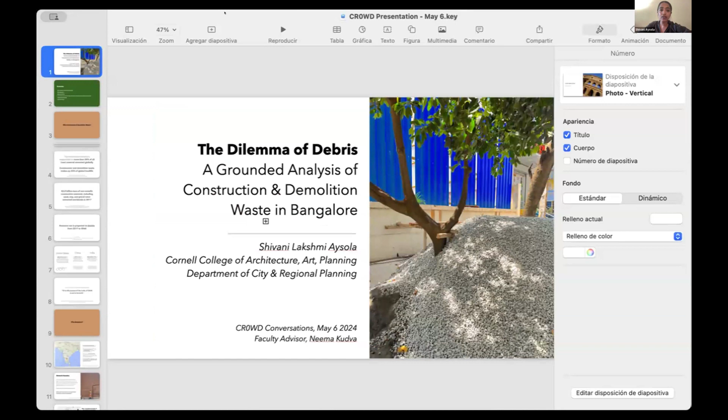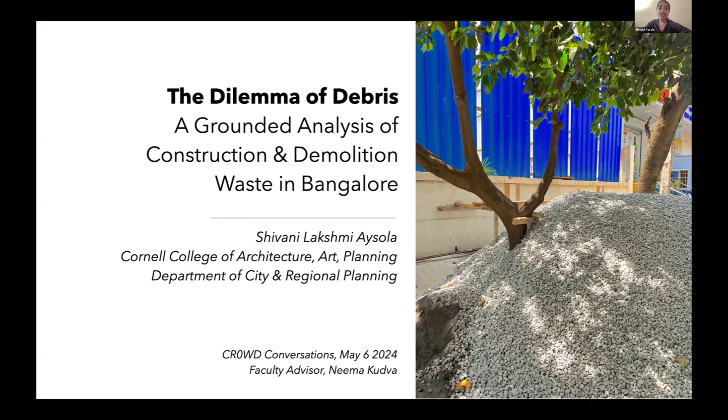Hi, hello everyone. As Gretchen mentioned, I'm Shivani Lakshmi Aysola, and I'm really excited to share my research with you today. The working title is The Dilemma of Debris. It's a grounded analysis of construction and demolition waste in Bangalore. My faculty advisor for this project is Neema Kudva here in CRP.

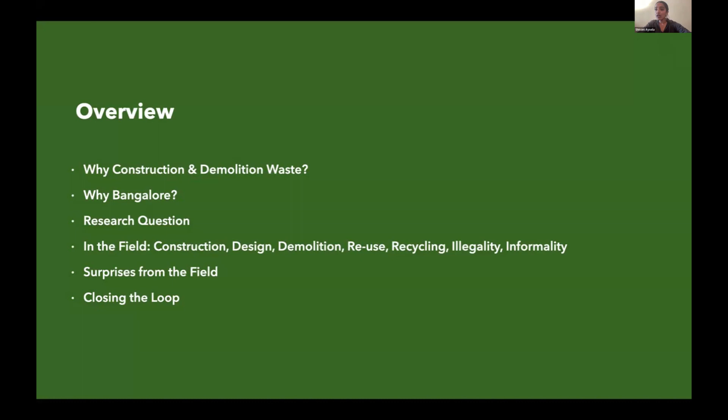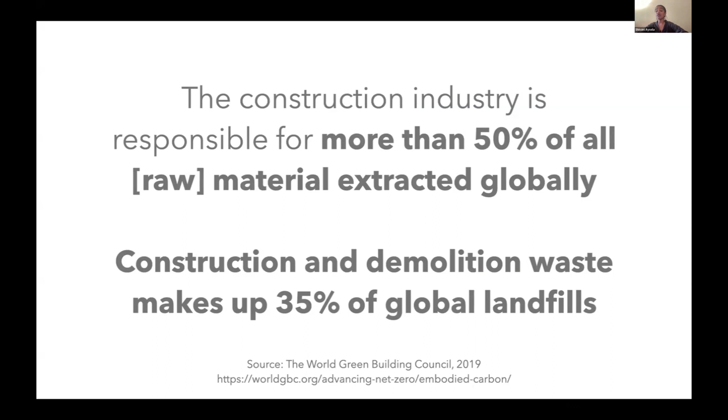So why construction and demolition waste? This is the question of the hour. As maybe most of us know, but if you're new to this type of research, I think you'd be interested to find out that the construction industry is responsible for more than 50% of all the raw material that is extracted globally. And of that, construction and demolition waste make up about 35% of what you see in global landfills. So this is a huge issue.

Of that, about 44 billion tons of non-metallic construction materials, and this is your sand, clay, gravel, all of that, were extracted worldwide in 2017, and it's only been exacerbated. And here's the fun part: resource use is projected to double, actually, from 2017 to 2060. So going back for a second, if we were at 44 billion tons of natural resources in 2017, you can imagine how much that'll be in the next 30 years or so.

Okay, here's just some quick facts. In the United States, 600 million tons of CDW, that's construction and demolition waste, were generated in 2018. That's twice the amount of all the other municipal solid waste. So everything that your households and offices are sending to landfills, this is actually doubled, just CDW alone. China has 1 billion tons of CDW, and they're only able to recycle 5% of that. India also has 300 million tons, and only 1% of that is recycled. So that's sort of the issue that we're dealing with.

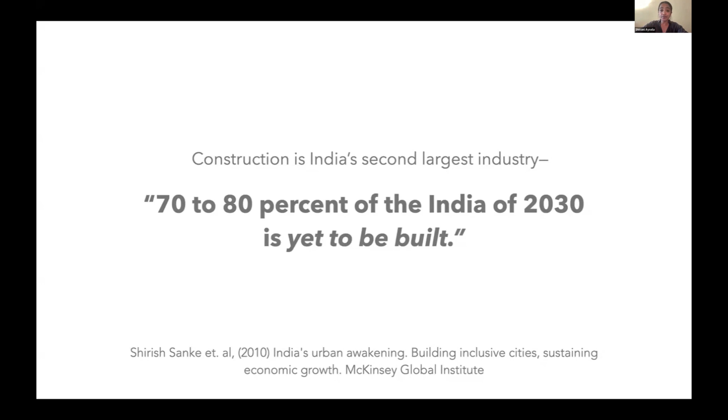Focusing in on India for a second, construction is India's second largest industry. And given the growth of the country, about 70 to 80% of the India of 2030 is yet to be built. So why Bangalore? Well, Bangalore, which is officially Bengaluru in Kannada, which is a language that they speak in the Indian state of Karnataka, it's India's 3rd largest city, and it's home to 8 million people. It's 11 million people if you include the entire metropolitan boundaries. And it's interesting to note, it's sort of self-stylized as India's Silicon Valley.

It's also one of the fastest growing metropolises, not just in Asia, but in the world, with a GDP for the city alone of $110 billion a couple years ago in 2022. Here's the fun part: all this growth leads to waste invariably, and about 3,000 tons of construction and demolition waste are generated every single day in Bangalore—that's about 250 truckloads of material.

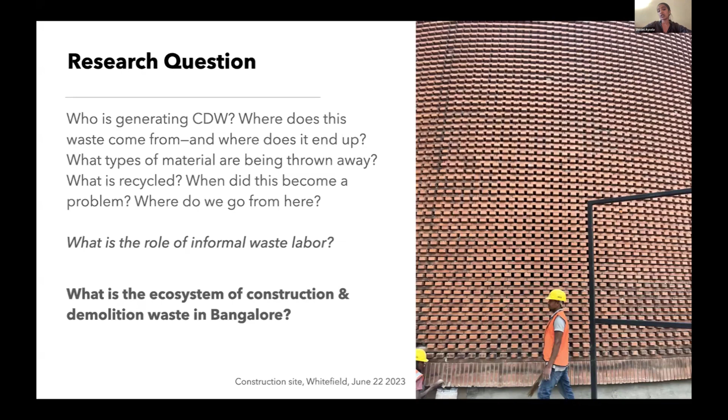My research questions around this project were multifold. I was curious who's generating this waste, where it comes from, where it ends up, what types of materials are being thrown away, what's recycled, what's not, when this became a problem, and where we go from here. I was also particularly interested in the role of informal waste labor, which we'll get to later. But really the all-encompassing question was: what is the ecosystem of construction and demolition waste in Bangalore?

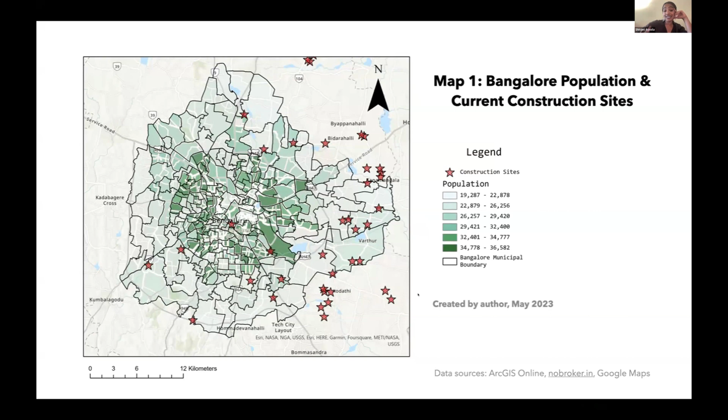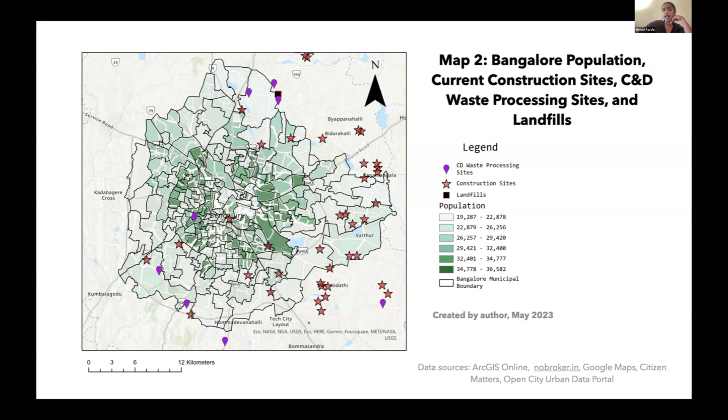Using that framework, I developed an idea around this ecosystem of construction and demolition waste. It starts with construction, goes into demolition, then you have reuse, and then design. Really at the center of this is policy. So that's the framework I was working with.

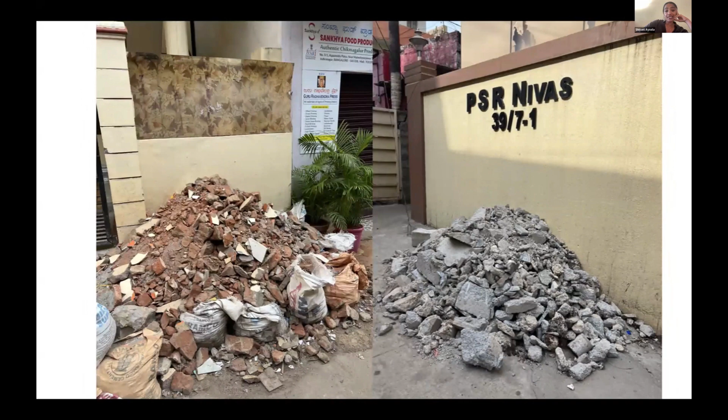Then I got into the field. I was in India, in Bangalore, for about two months last summer in 2023, and I could see immediately the construction and demolition waste everywhere. All these images I took within the first week of arriving, and it's kind of overwhelming—and it's not just the scale, sometimes you have small pieces as well.

This picture on the right is particularly interesting because it was taken at the BBMP, the main governmental headquarters of Bangalore. I was actually there at the offices to meet with their solid waste management officials, and—the calls coming from inside the house—they have their own construction demolition waste problems as well. So I knew I had a lot of work to do.

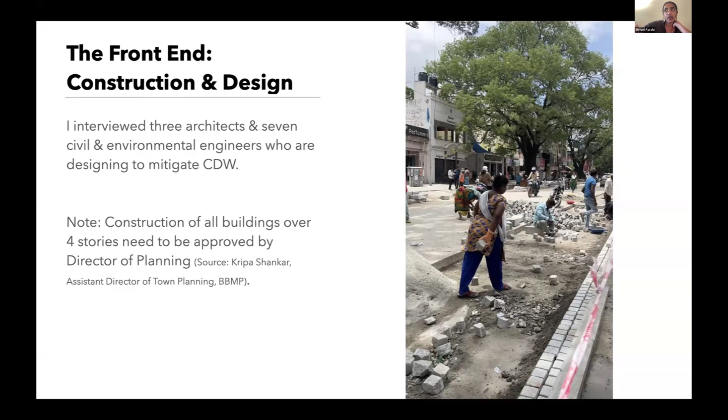Jumping into construction and design, I interviewed 3 architects and 7 civil and environmental engineers who are actively designing to mitigate CDW. Something interesting to note, a bit different from how things work in other cities: in Bangalore, the construction of all buildings over 4 stories needs to be approved by the director of planning. So you can start to see where the control lies.

Another architectural solution is called the Atelier, from another Bangalore-based firm called Biome. Their client was a nonprofit school, and the issue was quite interesting because they didn't own the land they wanted to build the school on—they could only lease it for 5 years. So they came to Biome and said, we need something really modular that could be taken apart and moved elsewhere in case our lease is up.

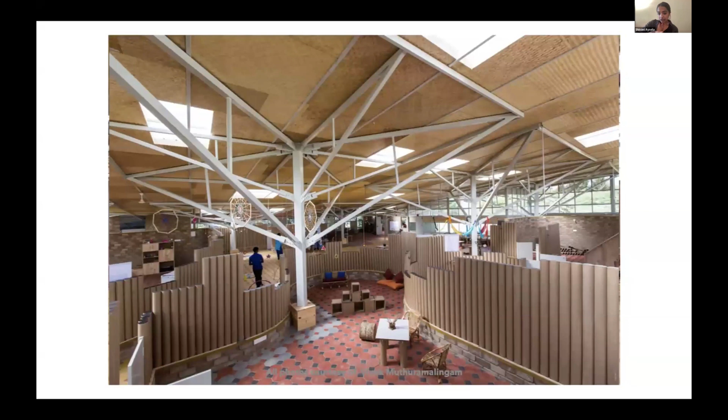Here's another view. You can see all of these cardboard partitions, also modular, can be reused. Next slide, please. Okay, this takes us into demolition and reuse.

These are some quotes from Akbar, one of the demolishers I was lucky enough to interview. He goes into the fiscal realities of his work. Some key takeaways you might find interesting: the average distance between a demolition site and the recycling center is 15 kilometers.

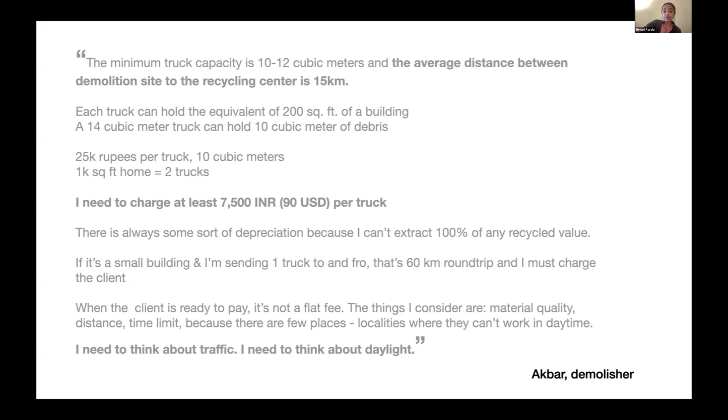They need to charge at least $90 per truck to recoup gasoline, labor, and so on. There's always some depreciation since he cannot extract 100% of any recycled value. This is an important takeaway too, the quote at the end: I need to think about traffic, I need to think about daylight. These are the issues demolishers face, the realities of their industry.

This is Iqbal Ji and I last August at the largest demolition site in Bangalore. He and Akbar Ji, whose quote was in the previous slide, both work above board as licensed businessmen. So I got a lot of intel from them about how the formalized demolition economy works.

It's been really interesting to see how the labor market has changed in their field. In the past, demolishers could sell old bricks for 50 paisa each, about 100 rupees, which comes out to $1.20 of profit. But 20 years ago, wages for daily laborers were between 6 to 24 cents, and now they're $8 to $12 — a huge exponential increase.

What this means is that rising labor costs lead to a more mechanized demolition process. You can see this in the back, there are quite a few large vehicles being used in this process, versus 20 years ago when it was a lot more hand-done demolition.

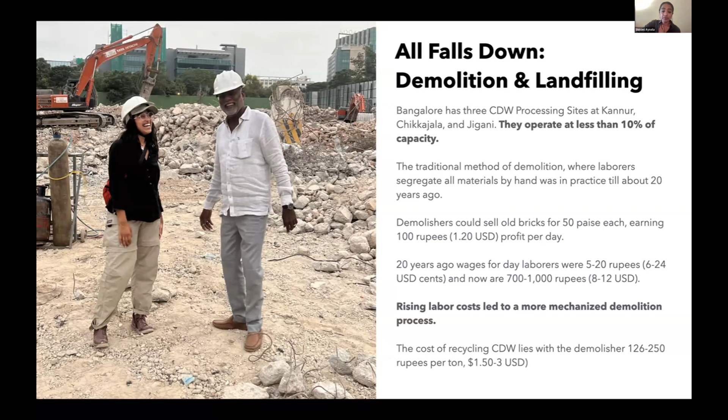So the main challenges for demolishers are rising labor costs, but also the cost of recycling after demolition. For example, Akbar Ji takes all of this waste each day to the recycler, about 15 kilometers away from this site, and then has to pay for it to be processed there. So he's not only paying for gas and workers, but also for the recycling itself, and this doesn't include wear and tear on their vehicles.

At the same time, they're not able to drive their trucks through the city between 10 a.m. to 6 p.m. A lot of constraints here.

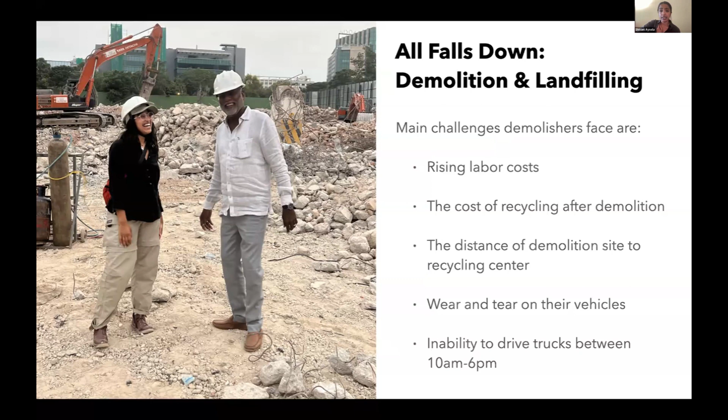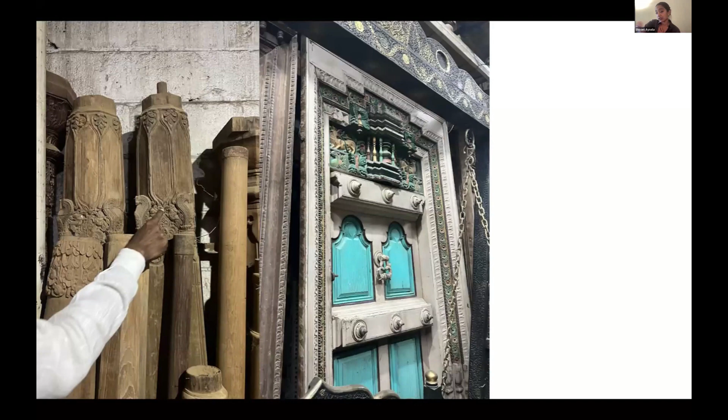This leads us into industrial scale recycling. Key here is the Yelahanka Landfill and Rock Crystal Processing Center. On paper, this is the largest landfill in Bangalore, and Rock Crystal is the only licensed construction and demolition waste processing center in the city.

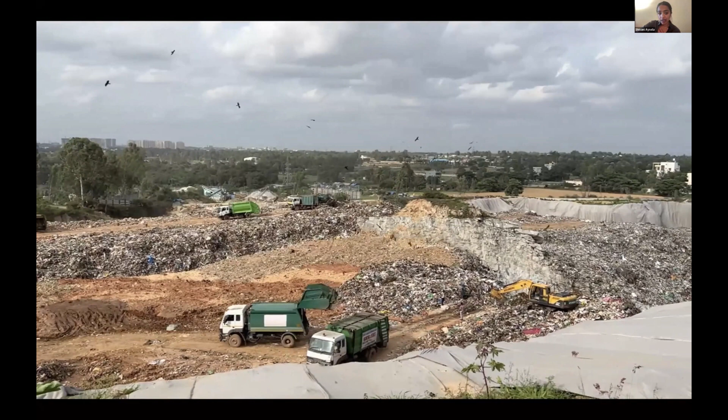So this is the landfill. This actually doesn't smell terrible, I think it's important to note. They do put down plastic at the end of every day, and they spray perfumes and fragrances too, to mitigate the scent.

But you can see it's an old quarry here, so this goes down for miles and miles. And this was last summer, so it's probably halfway filled up more than this now. This specific site should be decommissioned later this year, and it'll be filled up with waste.

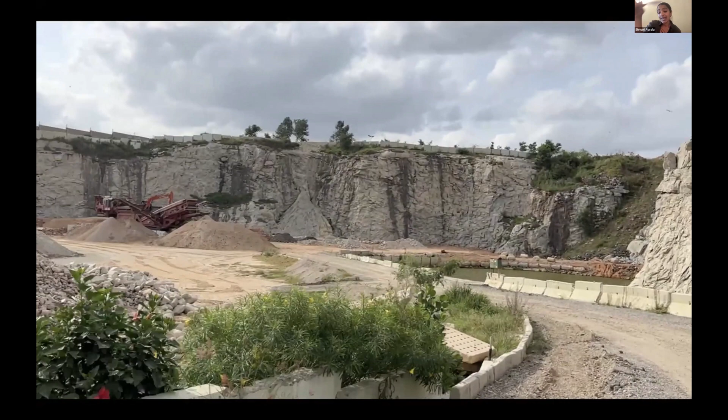So now that takes us into Rock Crystals, which is just over the wall that we just saw. This is the only place for construction and demolition waste recycling in the city, and you can see different types of quarry dust and things of that nature.

I'm going to skip through to the next slide. Oh, just kidding, no I'm not. Let's see, oh yeah, there we go. So here you can see bricks that aren't being pulverized and other types of concrete pylons in the back. So these will get reused just as is.

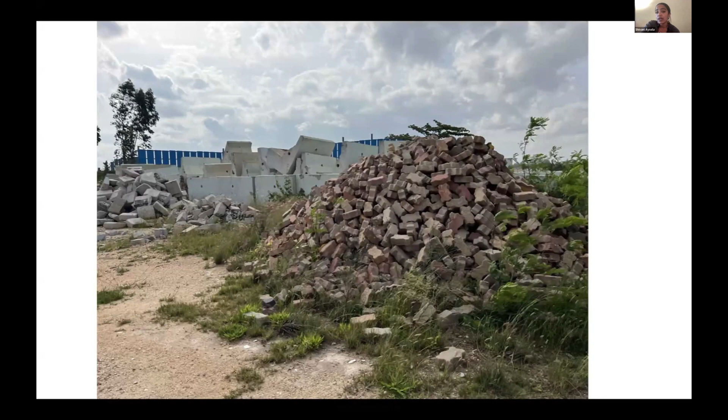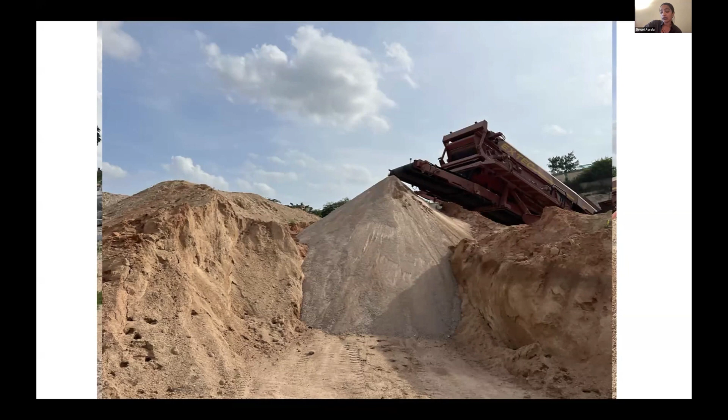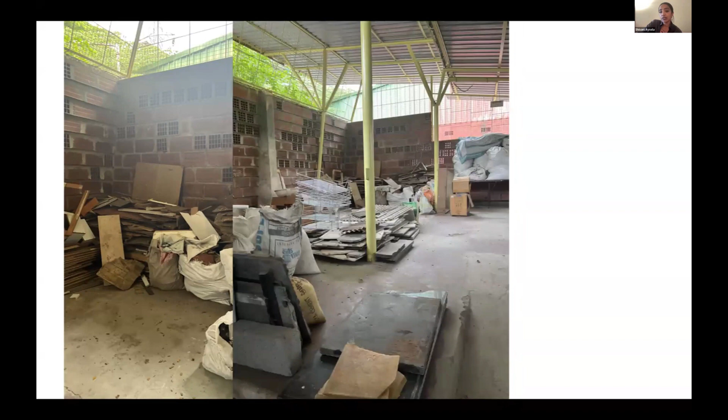Okay, small scale recycling—so we saw industrial, this is small scale. There's an organization called Sahas that is an aggregator of waste, because the industrial scale recycling we just saw has minimums of what they'll take on. So Sahas really works with household waste—if you're renovating a room in your house, for example, they'll collect the waste.

And as you can see, they're segregating the materials themselves, but they don't have a lot of space that they work with—this is just their office. As you can see, they receive 30 to 35 calls a month, but they can only accept 30% of those calls. That's because the waste is mixed, it's not segregated by material, and the location is too far. So we're starting to see the same issues again—it's all about location and the non-segregation of material.

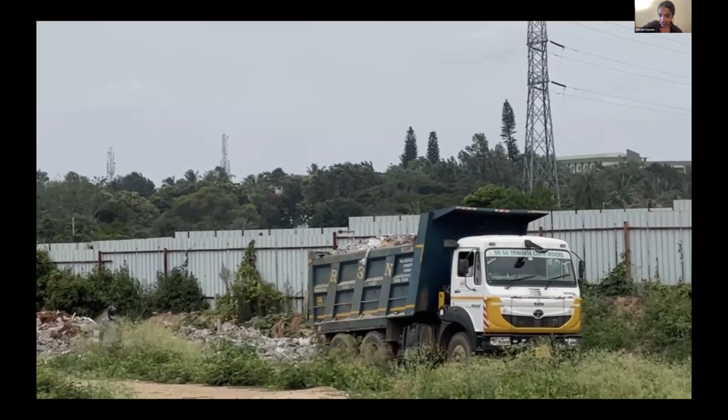Illegal dumping, our favorite topic. I feel very lucky, weirdly, to have caught this on video—here I was actually going to visit a number of lakes that I was told people were dumping construction and demolition waste in. You can see I've just pulled up to the lake here, and this man is just dumping his entire truckload of construction and demolition waste. So I asked him what's going on here, where did he get this material from? They were building an apartment building just down the road, and his boss told him to come here and dump it.

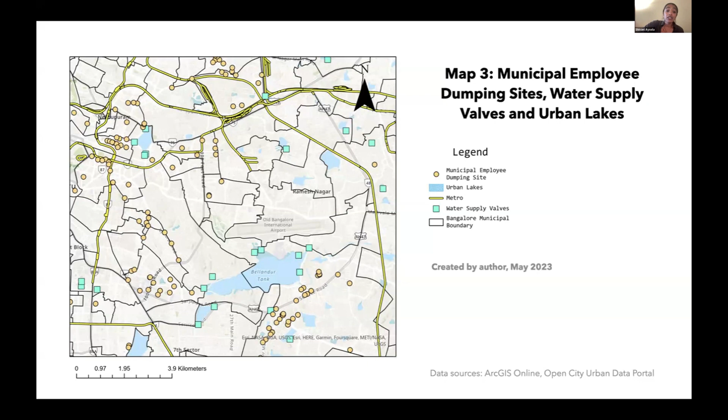This was a really interesting finding for me as well, the connection between the urban lakes in Bangalore and the construction of the metro. Again, the call is coming from inside the house. Here in orange, those circles represent sites where community members have reported dumping by municipal employees. You can see a correlation between where the metro is being constructed and where government employees are dumping, and there is some overlap with the location of water supply valves and urban lakes.

Some surprises, and I'll roll through these, were retrofitting and upcycling. When I started this research, I was really focused on a construction and demolition binary, and I totally didn't realize retrofitting and upcycling were such factors.

I got to go to this great upcycling conference about transforming workplaces. I was the only non-industry person there, and I heard from architects, developers, clients, and people innovating in the materials space. This was really important for me because it doubled down on the fact that it's so much easier to segregate waste when it's for retrofit projects.

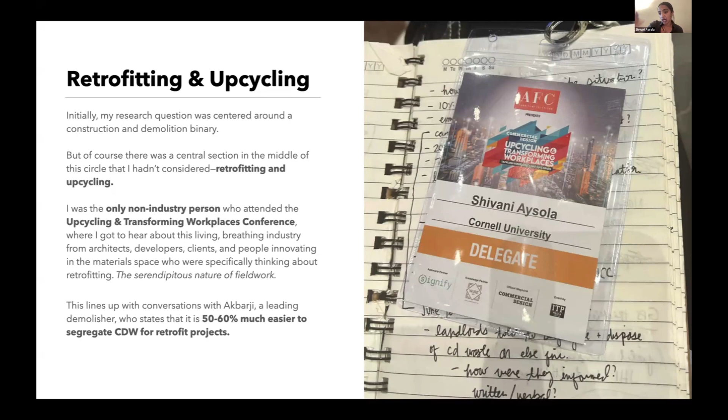Again, there's the role of informality, and if you study India, informality is really the main driver behind the economy. Some estimate that 90% of the Indian economy is informal. So what that means is you have large informal waste economies: plastics, metals, glass, all types of items are sold through a very hierarchical system of recycling and reuse. That's not the case for construction and demolition waste.

We talked a little bit about the metal recyclers and the heritage materials, but concrete and cement make up 30 to 40% of all construction and demolition waste, and it's not being recycled formally. Those plants are only operating at 10% capacity, but it's not being recycled informally either.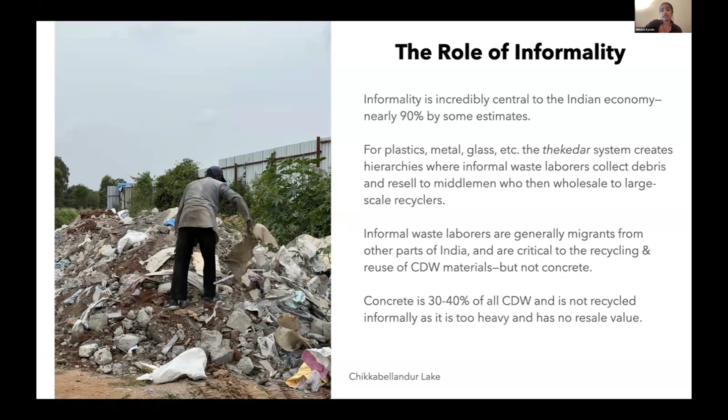This is a man, an immigrant from northern India who came to Bangalore and is working as an informal waste laborer. I asked him, and all the informal waste laborers I talked to, no one deals with concrete. Even the organizations working in waste labor don't deal with concrete because it's too heavy and has no resale value. That was really interesting, where you have a culture of such strong informal waste economies and no one is dealing with this material.

Oh, these photos are not working. Oh no. Oh gosh. Well, I have a bunch of photos here, but they don't seem to be populating really. Oh gosh, well, that's unfortunate.

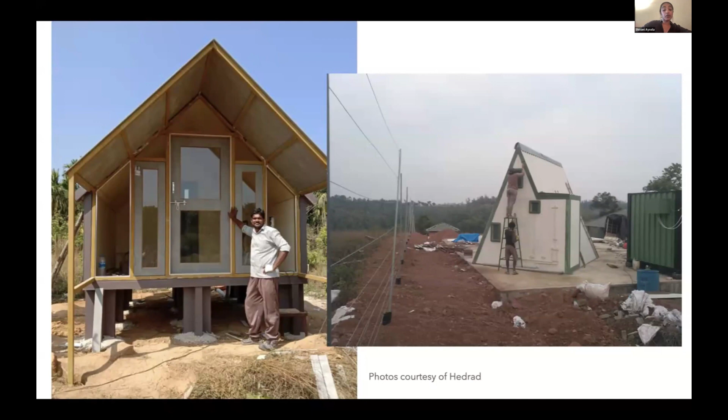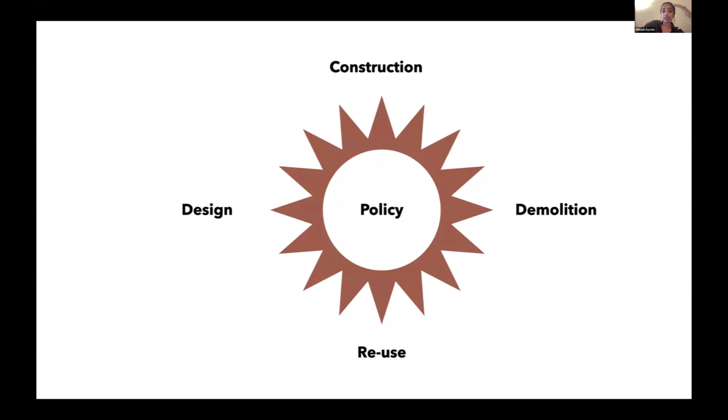And so, yeah, I wanted to say thank you, especially to Gretchen. I was an intern at the Christopherson Center my first semester here at Cornell, and I was doing deconstruction policy work, and it was fascinating. And I just sort of kept running with it, and was able to develop this project out of it and do a lot of really life-changing, interesting work. So yeah, I just wanted to say thank you to her and to Reps and Einaudi and Cornell for funding the project.

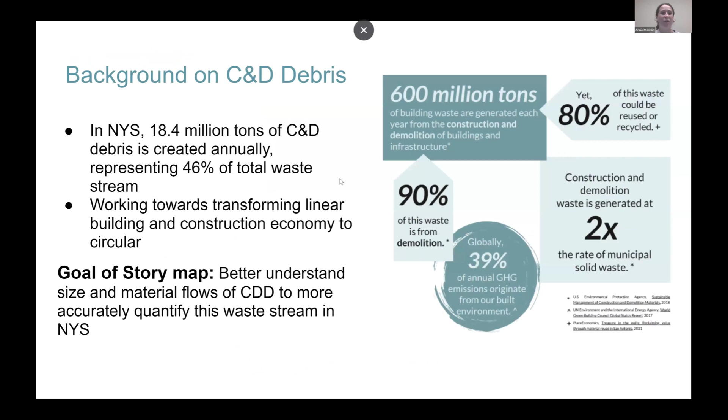Yeah, and so just for a bit of background to those new to CDD, or C&D debris, 600 million tons of building waste is generated each year from the construction and demolition of buildings and infrastructure, and 90% of this waste is from demolition. However, 80% of it could be reused or recycled, which shows a huge missed opportunity for reuse. In New York State specifically, 18.4 million tons of C&D debris is created annually, representing 46% of the total waste stream, so that's a huge portion of it.

And this shows the importance of working towards transforming from a linear building and construction economy to a circular one. And so the goal for this story map is to better understand size and material flows of CDD to more accurately quantify this waste stream in New York State.

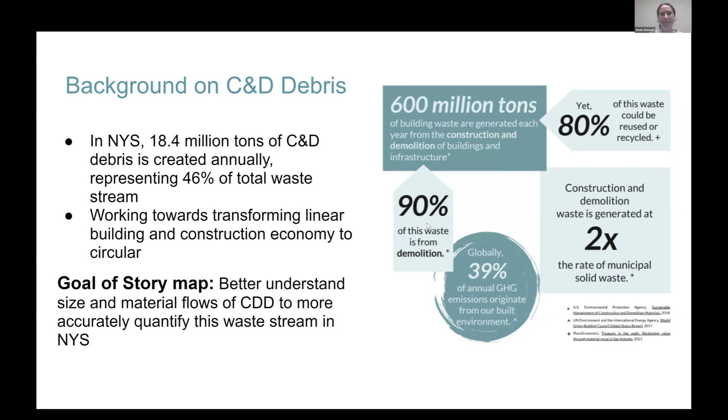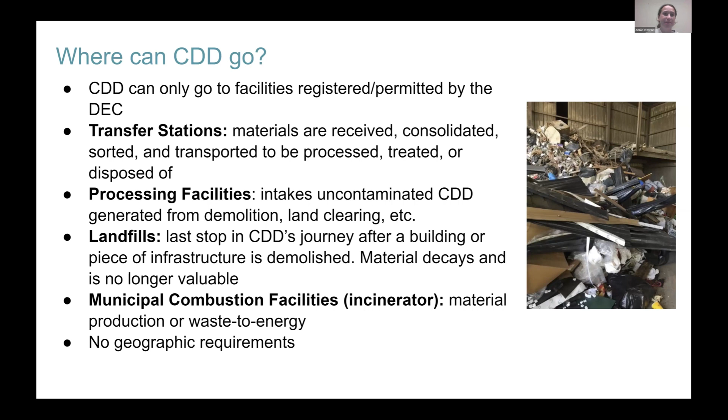For how we gathered our data for this story map, we got it from individual annual reports through the DEC open source data. The data is frustratingly often difficult to find, constantly changing, contradictory, and often outdated.

This shows the importance of the need for modernized and more stringent data collection requirements, as it really makes it difficult to accurately quantify where CDD goes.

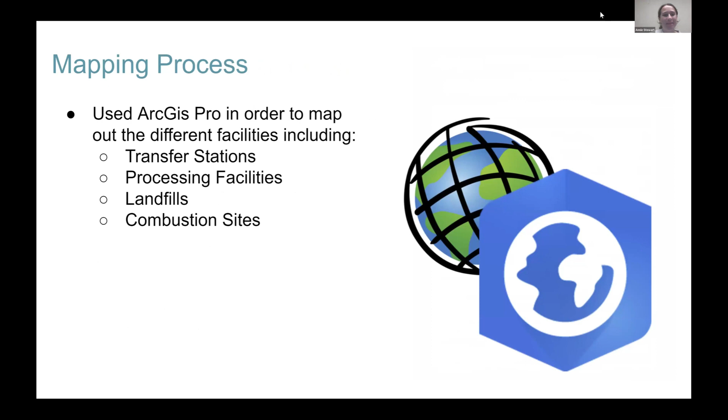So one of the things that we needed to do for the story map is map out all of these different facilities. What we did is we used ArcGIS Pro in order to map out the transfer stations, processing facilities, landfills, and the combustion sites. We organized them in a way that also shows it's an interactive map.

It also shows a lot of information based on these sites. You just scroll over to a site, and it'll tell you what it is and all the key information you need to know about the site, which also includes the expiration date.

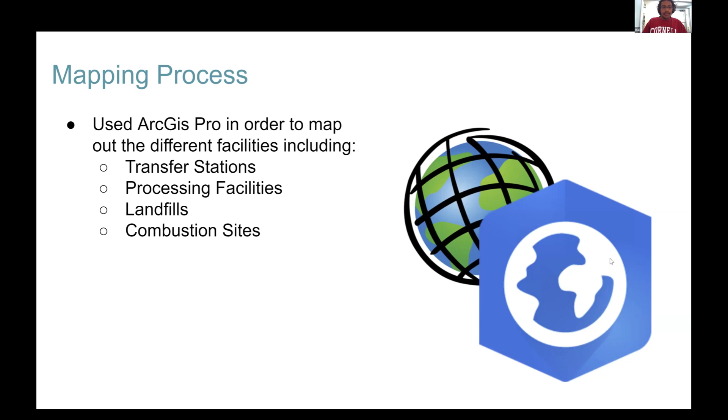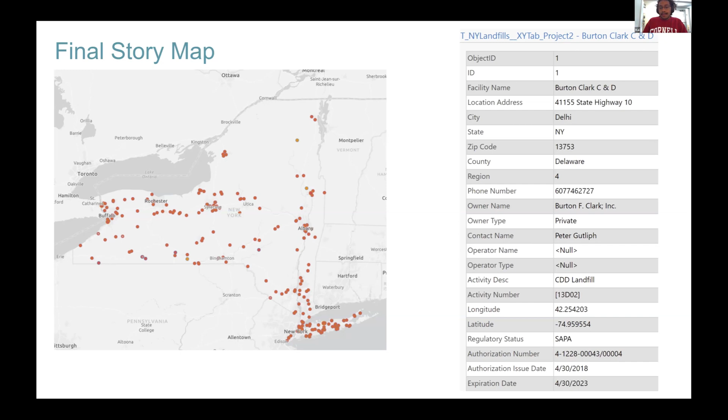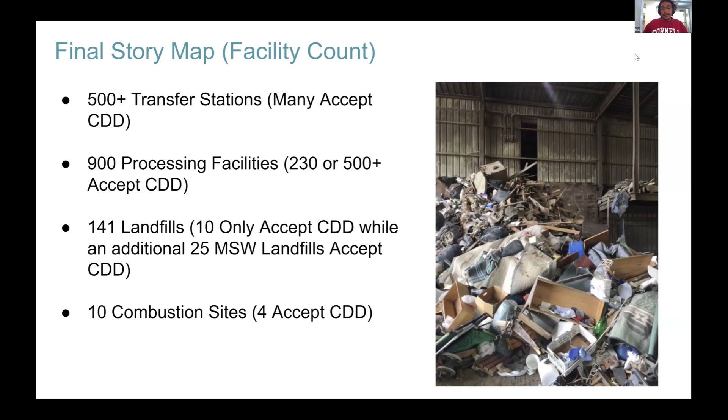As for why this data is important to have, as I said before, it allows for a better understanding of the size and material flows of CDD, and you can also see what regions in New York State are more burdened with this waste. We actually know that regions 5 and 6 have the least recycling or diversion rate of CDD, and they have the most landfilled, so those landfills are more burdened with it.

One data point included in this is closing dates. These are important because as the dates get closer for the permits, the question arises of where the waste will now go.

If no CDD is diverted, new facilities will have to be created or existing ones expanded. It's also been shown in communities that live around these facilities, there's been pushback against extending the dates so they have longer until they would close, because of things like decreased land price around these facilities, especially landfills, smell, and public health issues. A lot of upstate New York is feeling burdened with this.

Exportation out of state could also increase. Right now 10% is exported, but if there isn't an increased diversion rate, that number could increase. This all emphasizes the need for policy from state and local governments for support to divert these materials from landfills and continue reuse and recycling.